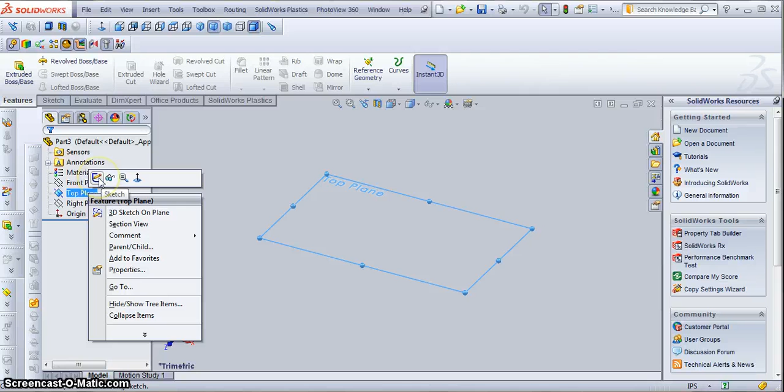Now we will select the top plane and right click. This will bring up a little menu here. It'll highlight it out and bring up this menu. We want to hit sketch because we need to make a sketch of a block to start with.

So we will come up under the sketch menu and select a rectangle. We're going to start out with this box that has the first click as center and the second click for sizing that block. This will keep it centered on the point of origin if we click that as our origin spot, or wherever your first click is. So we're going to start with that one.

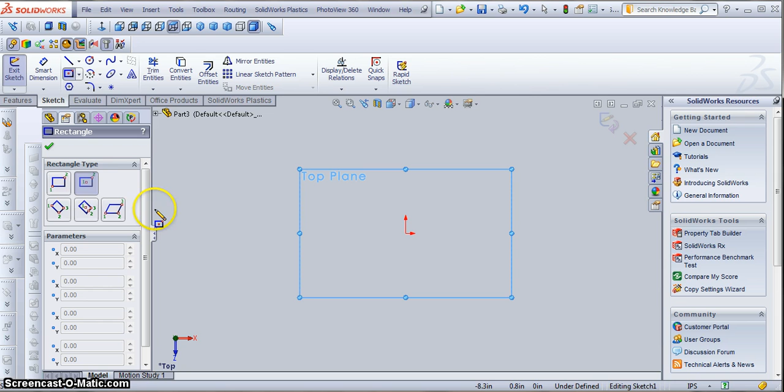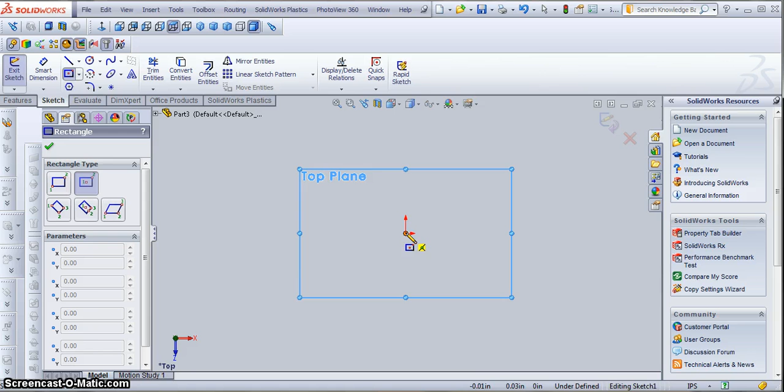If you notice, as you hover above your origin, it creates a yellow block with a couple of lines and a green dot. That means you are selecting that point, which is the origin, highlighted in orange. So we will click on that one, and then we'll just come out and give it some size.

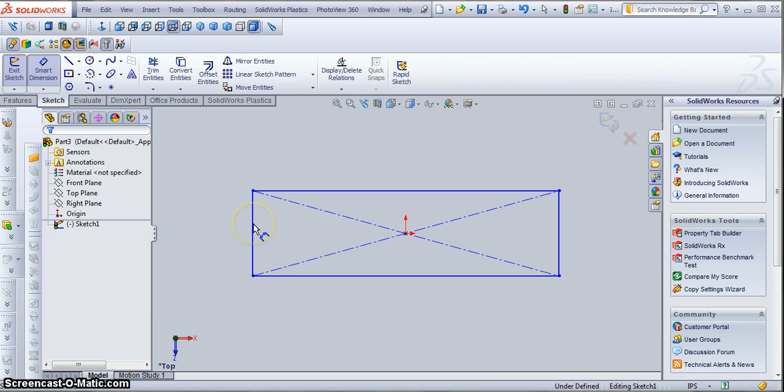Then we will come up to Smart Dimension, say OK here, then Smart Dimension. Now we can click on this line. We'll start by resizing this to 1 inch. That'll automatically resize both sides because they're linked together, since this is a rectangle.

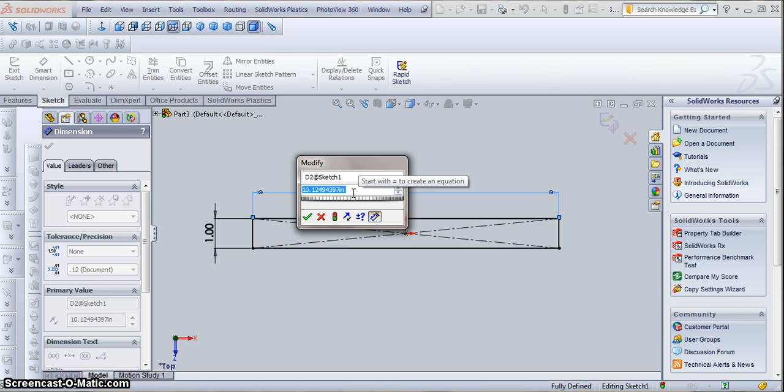Next, we will adjust the length of this box. So we'll make this box, say, 3 inches long. You can readjust this later if it does not fit your name in this.

Now that we have a box that's the size we want, we need to give it some depth. Because right now it's just a 2D drawing—we need a 3D object.

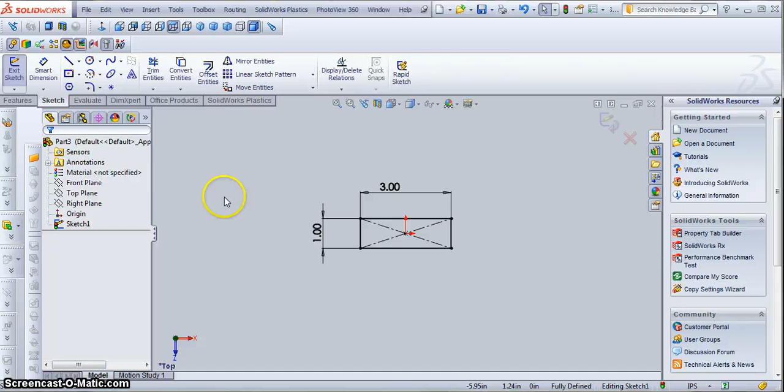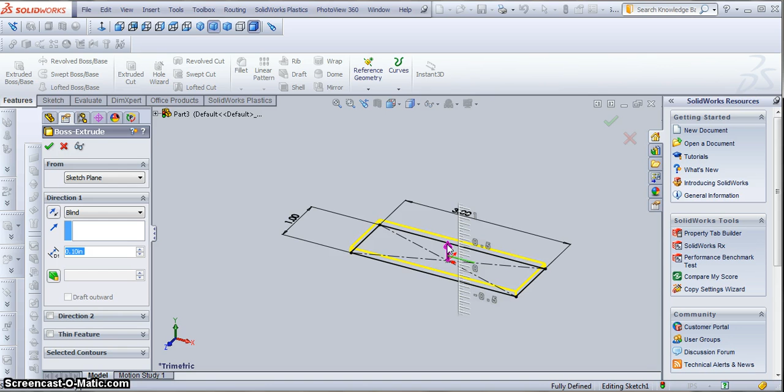So we're going to go up here to Features. Under Features, we have an option called Extruded Boss/Base. We click that. We can extrude up how far we want in two different ways. One, which is not as exact, we can use this arrow to change the height. Or over here, we can select an exact size that we want.

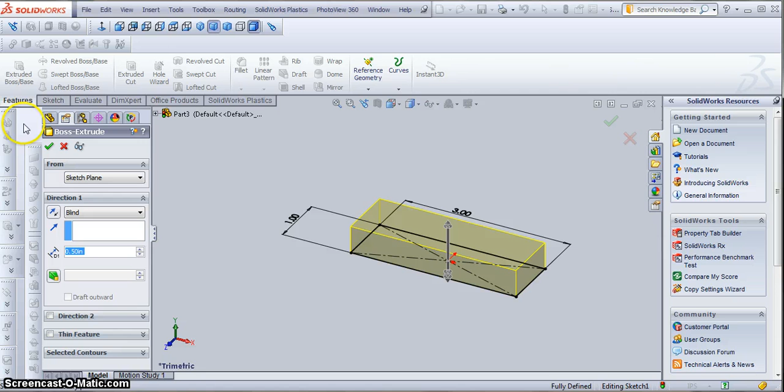So we're going to go 0.5 inches. Then we say yes, OK, up here in the corner. Now we have a solid box that we can start with to create our title block.

Now with this title block, on one side we will need to cut into it, and on the other side we will need to extrude our name.

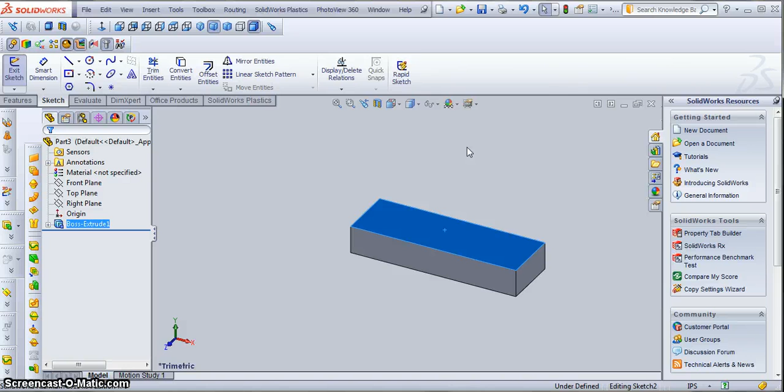First, we were going to select this top face here and right click on it, and then hit sketch again. That will highlight this face that we are going to draw on.

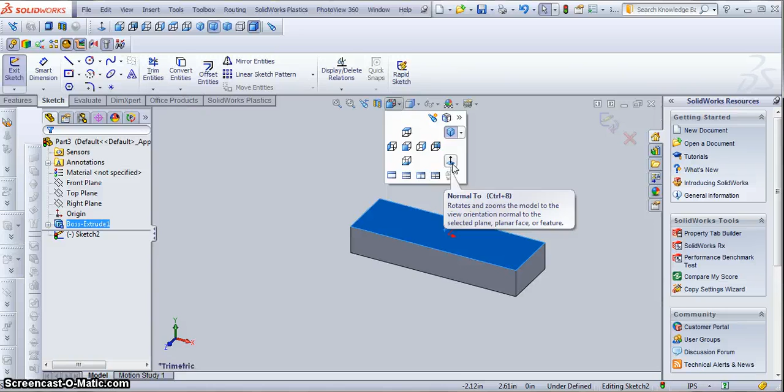Next, you need to put it in a position where you can easily look at what you're drawing on. So up here, there's a box that says View Orientation. We will hit the down arrow, and there's this option that says Normal To. That will move the view directly to face us.

Now we need to put some text on this. Under Sketch, there's an option with an A that says Text. We'll click that, and it will bring up this menu. We will now enter our name—so I will enter my name here.

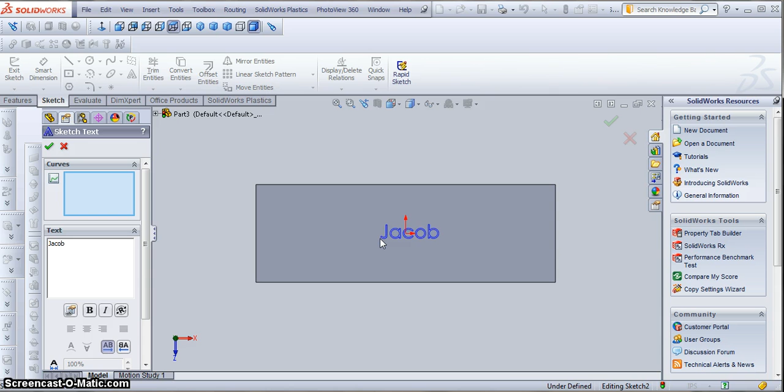And if you notice, if you come over here and click inside the square, you can move around where your name sits. That's pretty centered for my name, so I'm going to just leave it right there. And I'm going to say OK.

Now that just created some lines here. I'm going to zoom in. Those lines now have my name on it. We will now, under Features, cut those letters into this block.

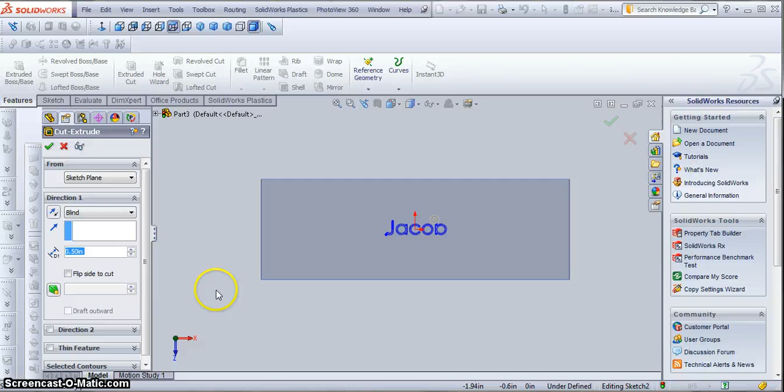Now you can see it automatically comes up with the dimension you last had, but we don't want that because we don't want to go clean through the box. If we turn the box, you can see that this is cutting into this box. But we don't want that far, so we're going to come in here and change this to 0.25.

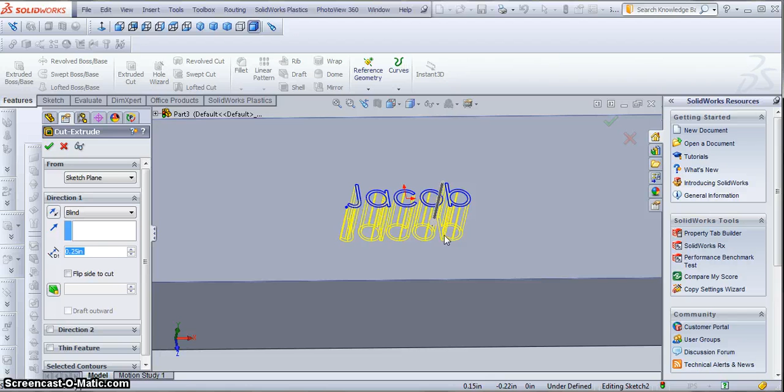So half the distance of the height of this box. So we will say OK. Now we zoom in here, you can see that you have letters that are cut into this box.

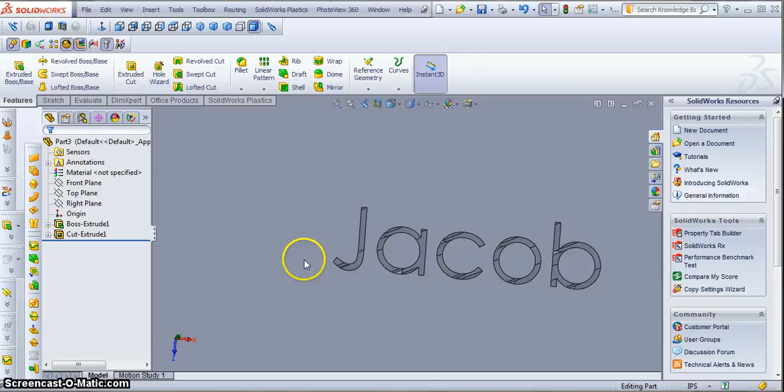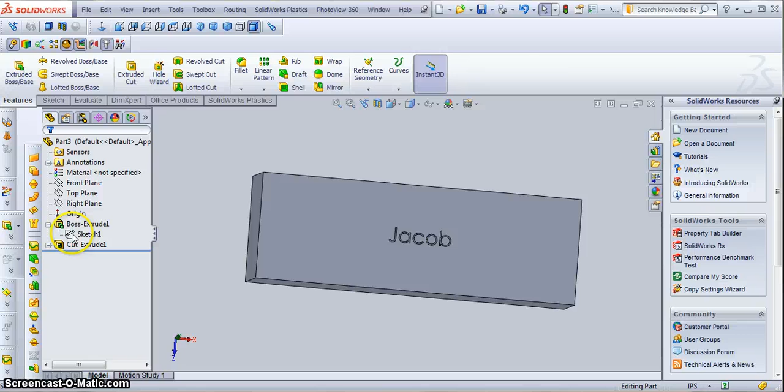So now we're going to resize this box because this box is way too big. So if we right click on Boss Extrude, you can come in here and edit sketch, or you can hit the plus arrow on the side and come down to the sketch and right click it and edit the sketch there. Either one will work.

Since this is too big, I'm going to change this dimension. So I'm going to left click on it, and I'm going to change it to 0.5 inches. Then I'm going to say OK here.

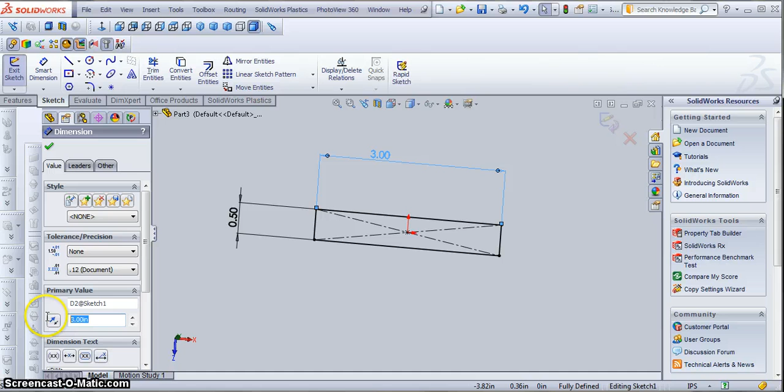Then I'm going to click on this dimension here. I'm going to change it from 3 inches to 1.5 inches. I think that'll be pretty close.

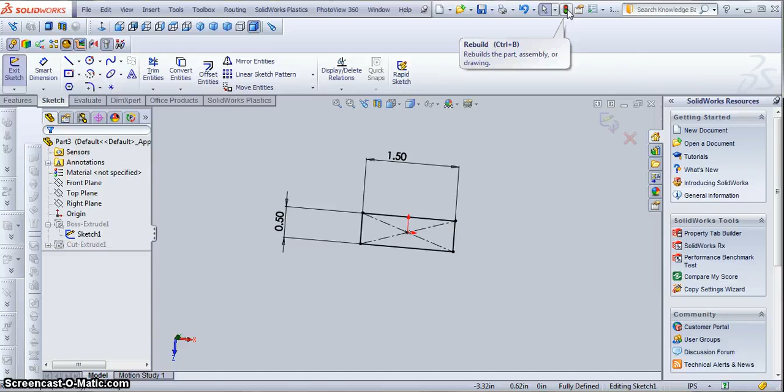Then after resizing, I will go up here to the top where it says rebuild. You have a green and red light, sort of like a stoplight. You'll click on that and it will rebuild the object. You notice over here you have everything highlighted, then nothing's highlighted, so everything is completed at the moment.

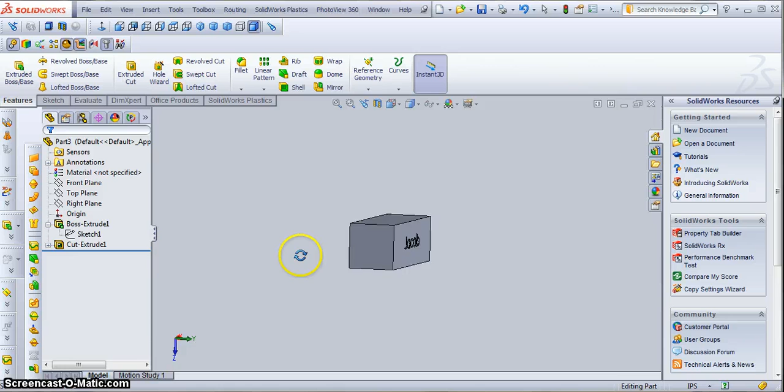Okay, we are going to take this and we are going to sketch on the back side. So right click again and then edit sketch. Again, we will come up here and we will say Normal To.

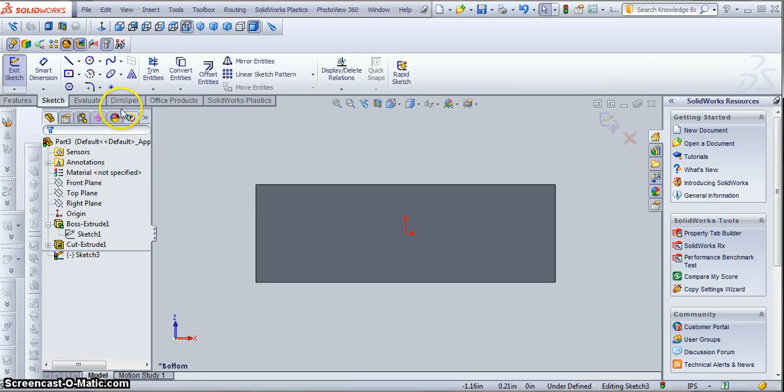Okay, now this time we will sketch again our name. Now I'm going to come down here.

You can adjust by taking off this check mark, use document font. We can change the size of these letters, so I can make it bigger or longer. I can also adjust the spacing. You can also adjust the font by clicking Font.

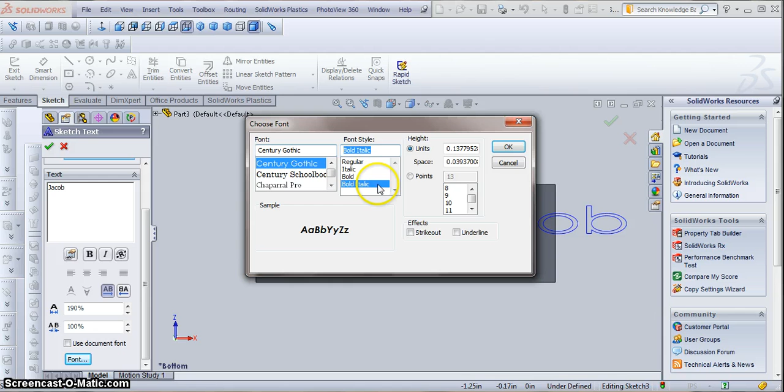Okay, now that this comes up with font, we can change this. We're going to go to a bold italic. We will stay with Century Gothic, and then we will change the points.

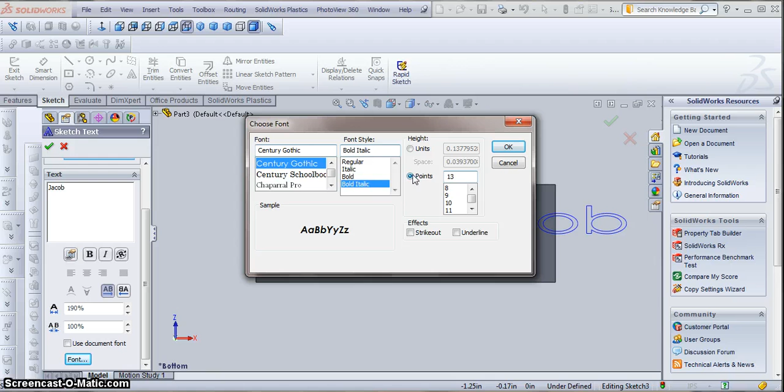So we can change this to any point structure we want by clicking here on points. It's at 13 currently, so let's change this to, we'll say, a 16. We'll say OK. You notice now that my name is italicized and it has been changed in size.

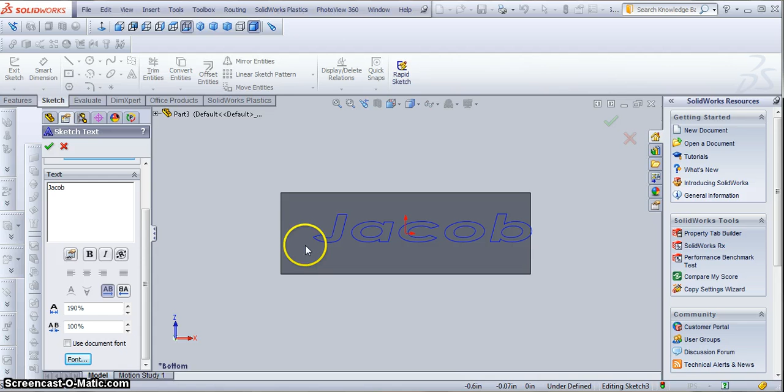Again, clicking to move it to center, I can adjust where it ends up. And that's pretty centered right there. Then we'll come in here and say OK, that we want this sketch text.

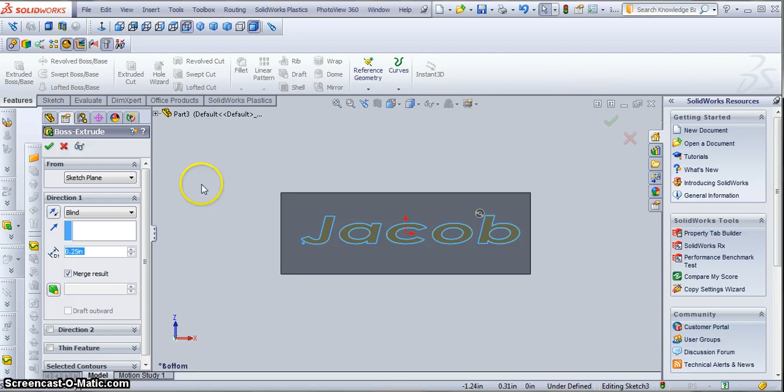Okay, now that we have this drawing, we're going to go to Features and we're going to extrude. Now when we extrude, we can turn this and see how it's going to extrude. So I'm going to change this from a 1/4 inch to an 1/8 inch.

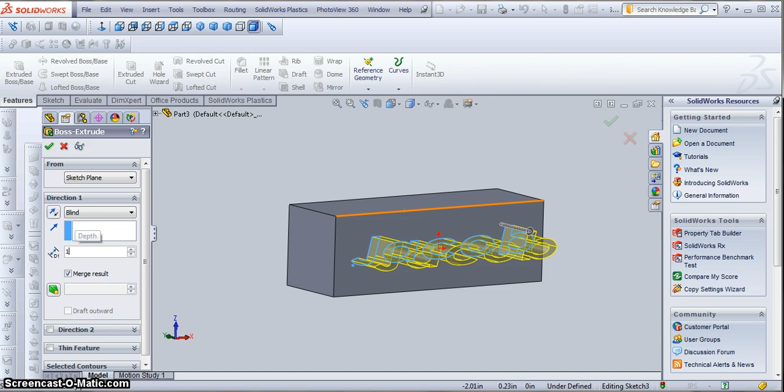So I can go in 1 divided by 8. Oops, first delete the information that was there. Then I can go 1 divided by 8. If you notice, it'll act like a calculator. It'll automatically change that fraction into a decimal. So we will say OK.

And now you have your name block.